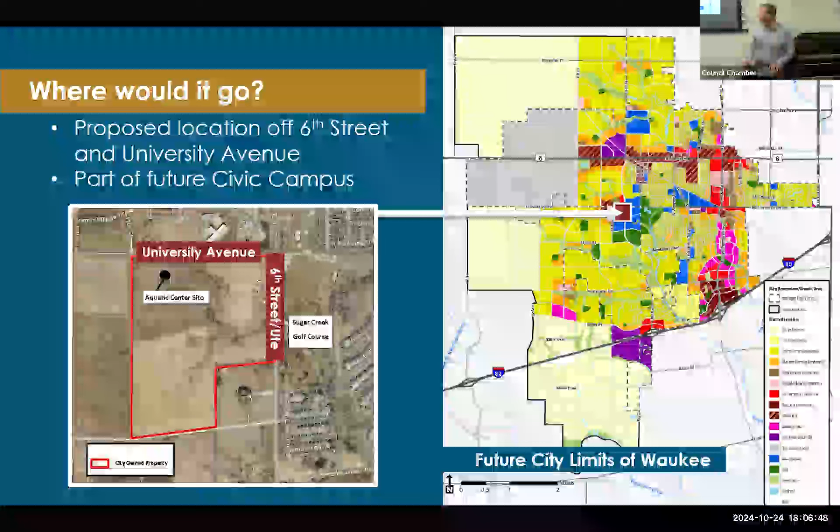Why this location? The map on the right shows the long-term growth pattern within the city of Waukee. Long-term, as the city continues to annex property and development occurs, those become our final growth boundaries. This location ends up being almost square in the middle of our long-term community. In putting this location together, it was thought to centrally locate it, not only for today's residents but looking long-term into the future.

We also own this property today, which is another deciding factor. It's part of a 240-acre parcel of ground that the city of Waukee owns, intended to be developed for additional public facilities and other amenities over the next 10 to 15 to 20 years.

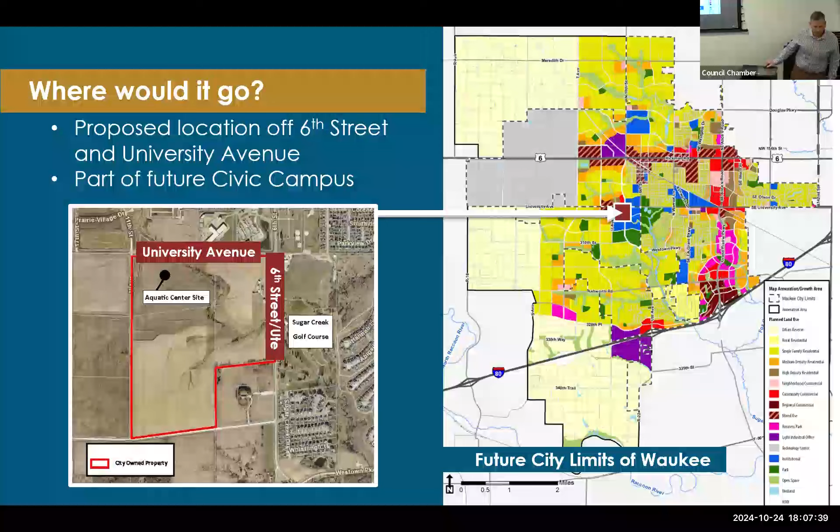So that's really the history and background relative to not only past votes on aquatics, but also why we're proposing this at this location. With that, I'll turn it over to Kyle. All right, thank you. Can you hear me okay? Yeah, awesome. Well, like was mentioned, we might have somebody advance the slides if you don't mind.

Water's Edge did a pretty extensive feasibility study, and through that process of public engagement, concept development, stakeholder meetings, and online surveys, this was the final design that was developed. We're going to walk through the different parts of it to give you a sense of the scope and scale, the different amenities that would be offered in this facility, and more background on what it would entail.

All in, the pool facility has 22,600 square feet of water, divided into 4 different basins or areas for people to move about and enjoy the water. That's a capacity of over 1,500 people, and based on usage mapping and demand in the region, we're anticipating 94,000 visits throughout a summer season, from Memorial Day to Labor Day.

As you can see here, the intent is to start construction in the fall of 2025, build through that fall and winter into 2026, and have it up and operational in 2027.

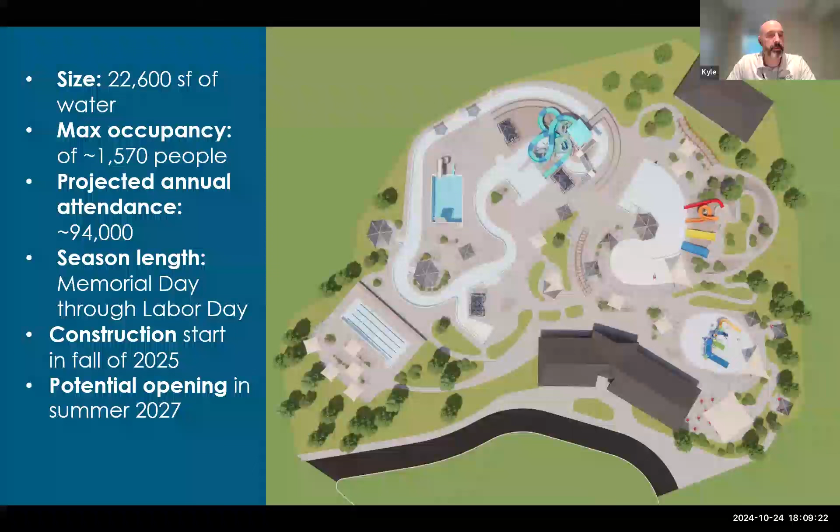Let's focus on what we'd call the leisure or kid pool. This pool is about 7,100 square feet and has a variety of different amenities, intended to give a broad breadth of features for different age groups and ability levels. It starts at 0 depth and goes down to approximately 4 feet, with a nice broad open area for kids to walk in and enjoy the water. In that shallow water, there'd be sprays, water slides, and a shaded bench area.

As you progress into the deeper section of the pool, it gets a little more active, with different water slides available and amenities like basketball that can be played in. Next to that is the lazy river.

The lazy river is 11,500 square feet, with a width of 10 feet so tubes can go through it. Along the outside of the river are different amenities like water slides, shade canopies, shaded areas, and potential rental spaces for guests.

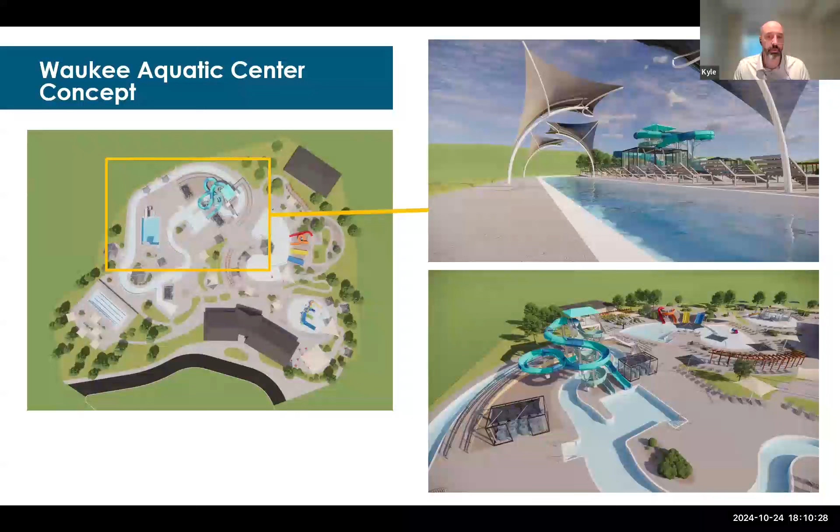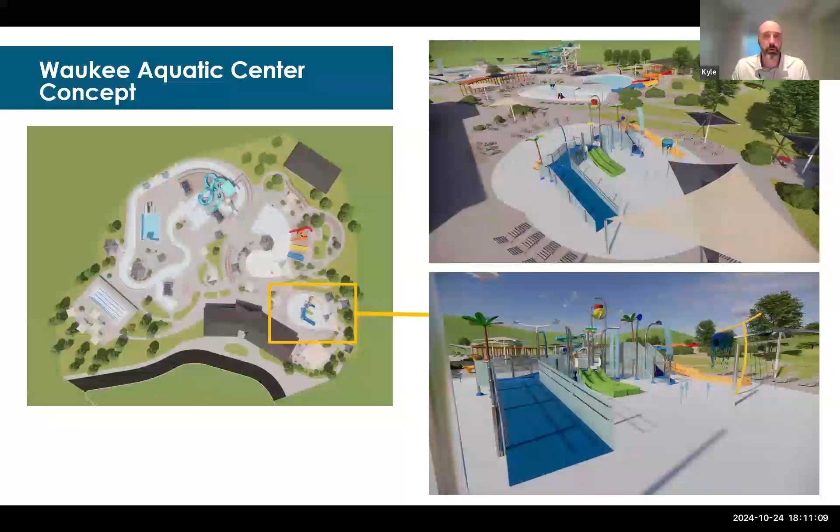One of the really unique parts of this project is the splash pad. The intent, right near the entrance of the building, is an ADA accessible splash pad, about 3,000 square feet of water. There's no standing water, but it'd be accessible for people with disabilities, with nice ramps coming up to the play structure. Once on the play structures, there's a variety of amenities: water dumping buckets, spray cannons, and different nozzles that are very interactive for kids of all ages.

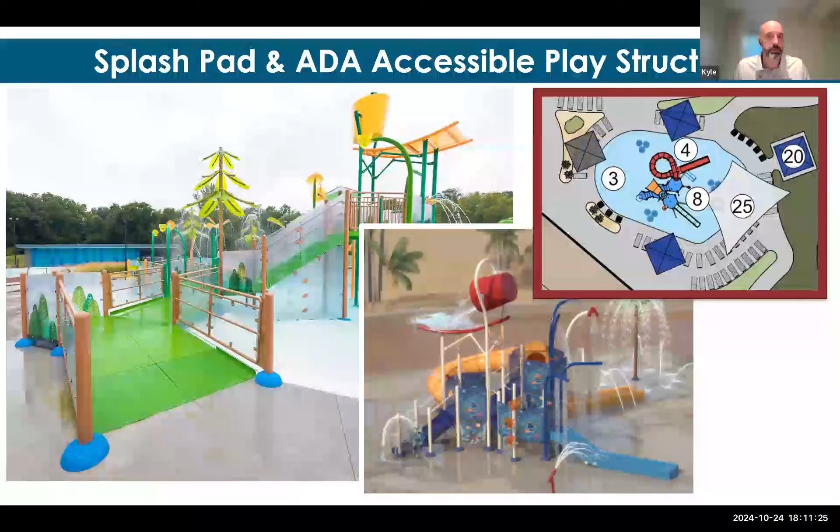Here are some images of what that could potentially look like. You can see that ramp area, and a nice tall feature could be on top of it with a dumping bucket feature that throws a lot of water out and is really exciting for the kids.

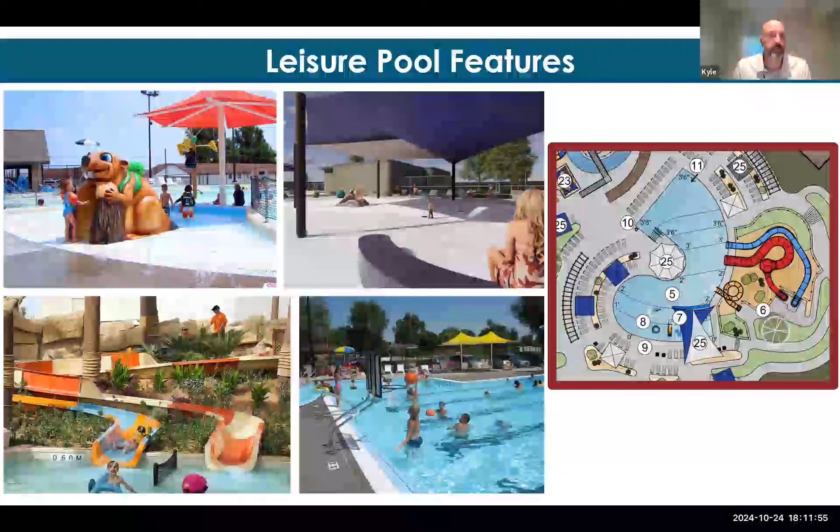Some more images of the potential lazy river. On top, you can see tubes going around; the design intent is multiple tubes, whether single or double riders, with shaded spaces inside the river that people can relax under. Also inside the river is the intent for a potential deep water pool with diving boards. The bottom images show shade canopies that would be over the river, and potential rental cabanas along the river so people can rent that space and relax by the river.

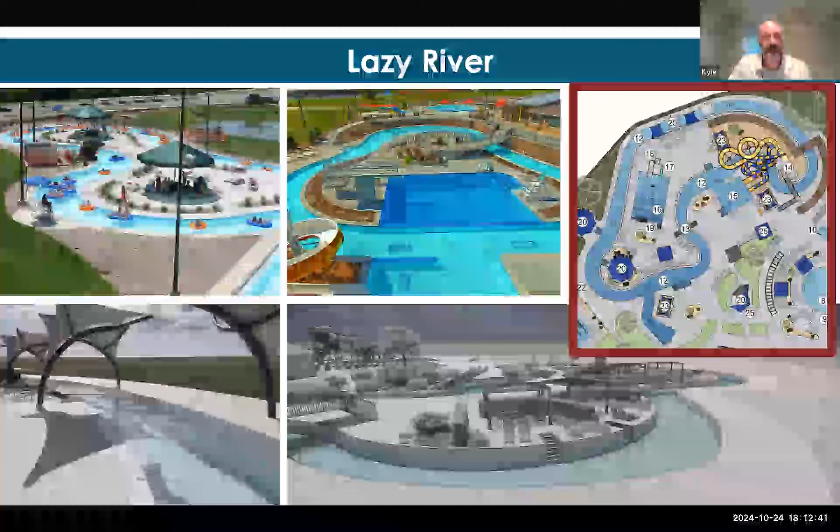Again, the inside of that lazy river would be a deep water area, so diving boards and a jumping platform are planned in that area.

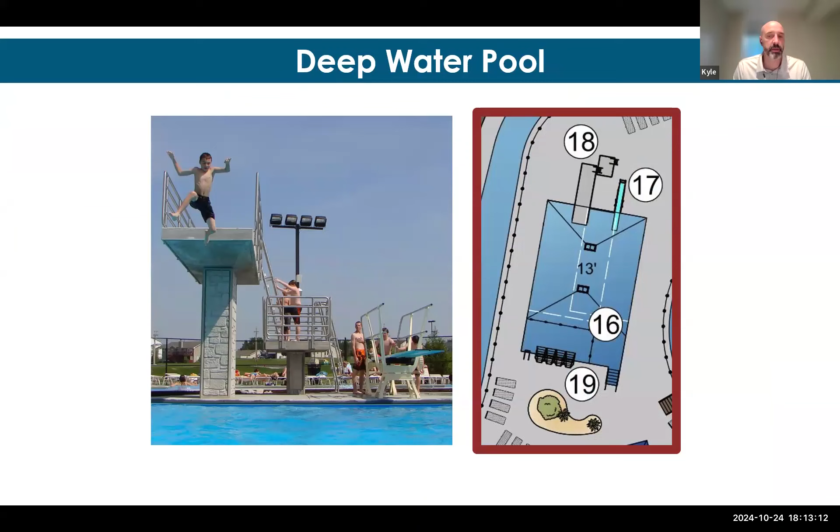One of the other unique features about this is the lap pool. It's pulled to the south and to the west, a little away from that high activity area. It's long enough for lap swimming, with the intent to be about 3.5 to 5 feet deep. This can be used a number of different ways: it can be a nice relaxing space, kind of away from the hustle and bustle of the big active areas, and it could also be used for water aerobics, swim lessons, and different types of programming that maybe doesn't need that full space of the big part of the facility. It can be managed up in this quieter area.

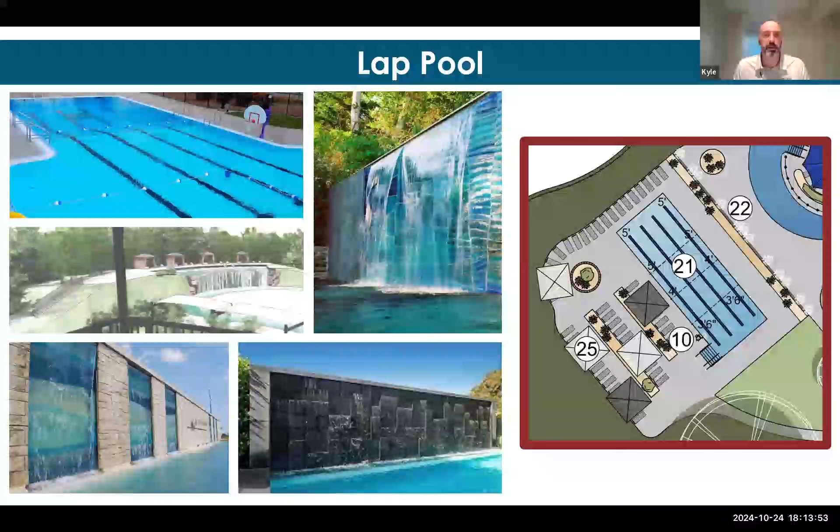Throughout the entire facility, there'll be a variety of different shade and seating areas. Shade inside the pool gives people in the water a place to relax and get out of the sun. Shade around the perimeter, at the concession area, or rental spaces around the river. And then also just a variety of different areas that would be landscaped with potential grass or minimal maintenance plants, just to soften the edges so it's not all full concrete from fence to fence.

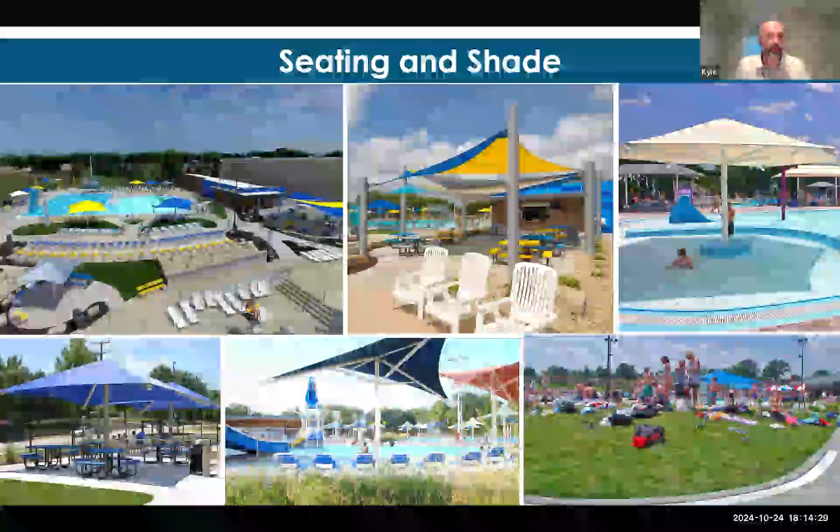One question that we got was water usage. So after we laid out the facility, one of the efforts we did was estimate the water consumption. We looked at a variety of different things: water that's lost from evaporation and splash out, water lost through hosing things down, the changing areas, the showers, the toilets, the sinks, all those types of things. That's estimated, and the projected water amount is 10 to 15,000 gallons a day.

Being as sensitive as we can to the demands used to run these facilities, we fully intend the design to be as efficient as possible with pumps, filters, and all electrical capacity. So using LED lighting, using pumps with drives that reduce power consumption, using filtration systems that reduce water consumption and the waste produced. Also, as a benefit, the less water we send to the sewer, the less chemicals we have to put in there. So it's about finding those opportunities to add as many types of equipment that will optimize the utilities and the water being used for the park.

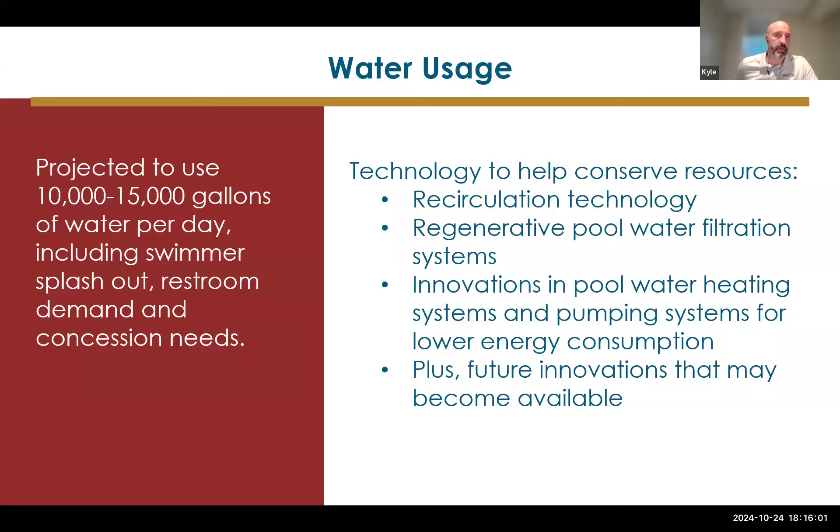So just kind of some of the, Matt, did you want to go? Either you can take this one, you can fill in the gaps that I miss.

Sorry about that. So in addition to part of the feasibility study, doing that engagement, getting that feedback, generating these concepts, analyzing the cost to build, another important part of it was the cost to operate. We looked at two things: potential revenue and potential expenditure. Revenue is going to look at seasonal passes, daily passes, rental opportunities, concessions, and then classes and programs, like water aerobics and swim lessons, those kind of programs on a facility this size, utilizing data for facilities within the region and the price points there.

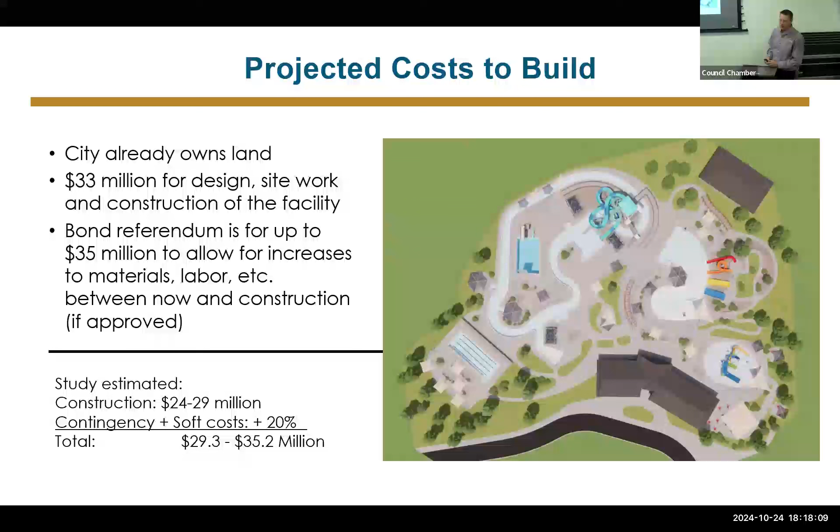So our funding model is 60% would come from the increase to city tax levy via your property tax, 30% would come from the current levy revenues, and 10% would come from other sources such as the local option sales tax and the public improvement fund with Apple.

So in our example, a $350,000 valuation home would see approximately a $119 increase on annual property taxes.